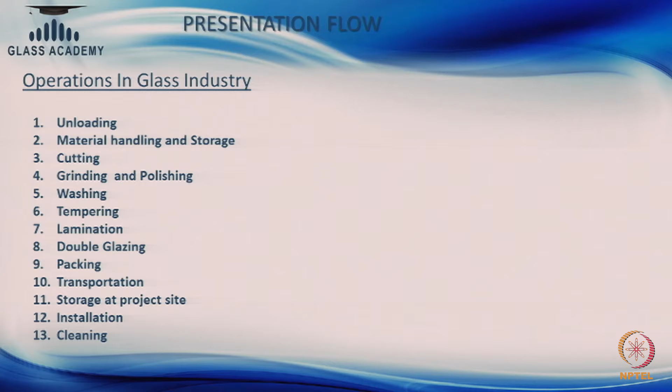I am working here as an application engineer. So my topic is on grinding and fabrication. Presentation flow: standard operating procedure in processing. Operations in glass industries: unloading, material handling and storage; cutting, grinding and polishing; washing, tempering, lamination, double glazing, packing, transportation, storage at project site, installation and cleaning.

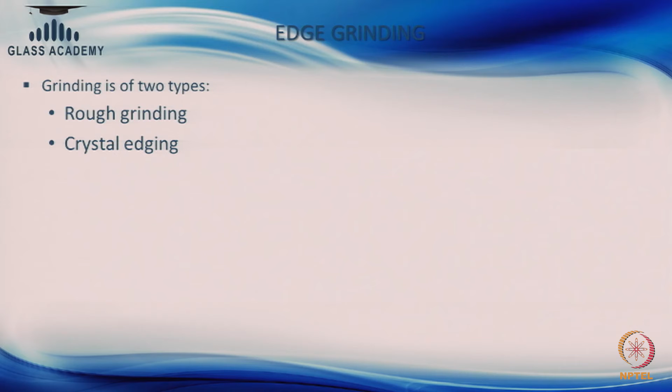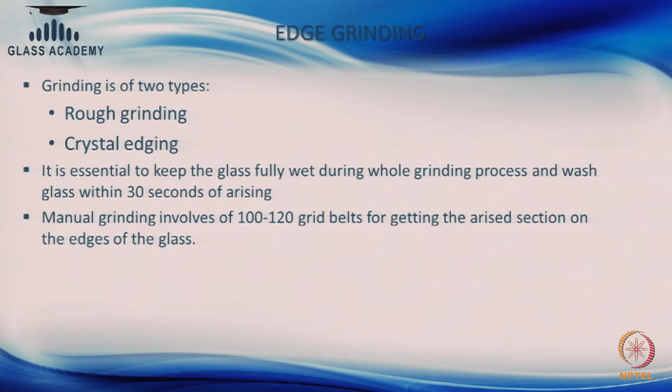It is essential to keep the glass fully wet during the whole grinding process and wash the glass within 30 seconds of arising. Manual grinding involves 100 to 120 grit belts for getting the arise section on the edges of the glass. The belt should run in a downward direction to minimize the grit deposited on the surface. If the grinding is not done properly, then the temperature in the furnace should be increased.

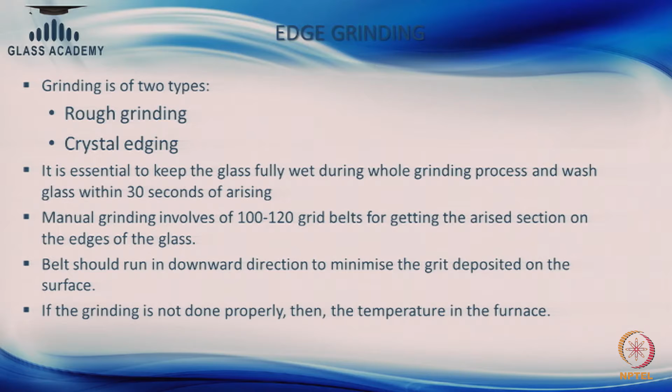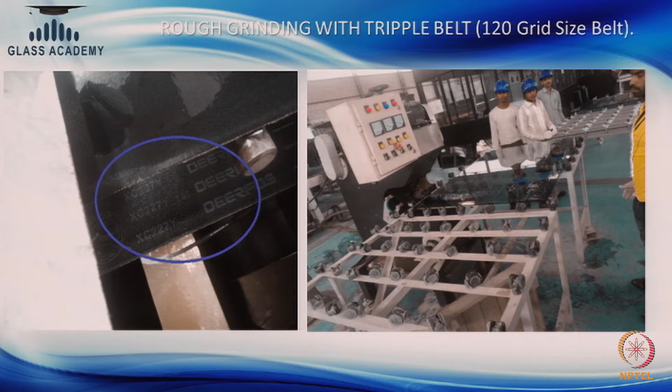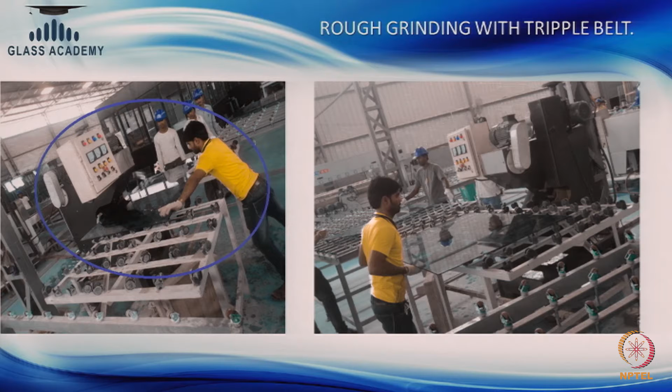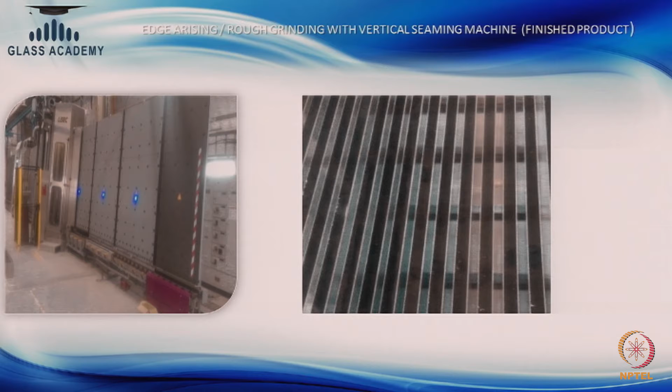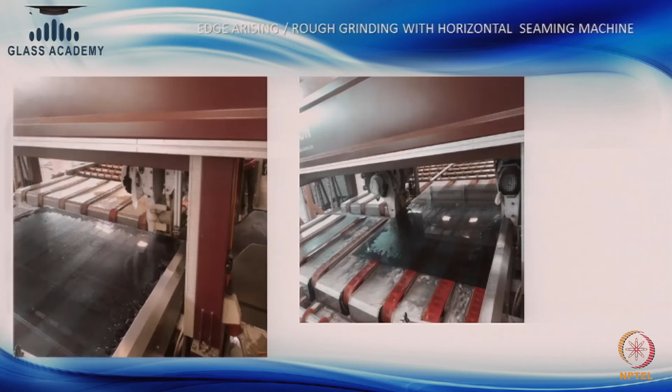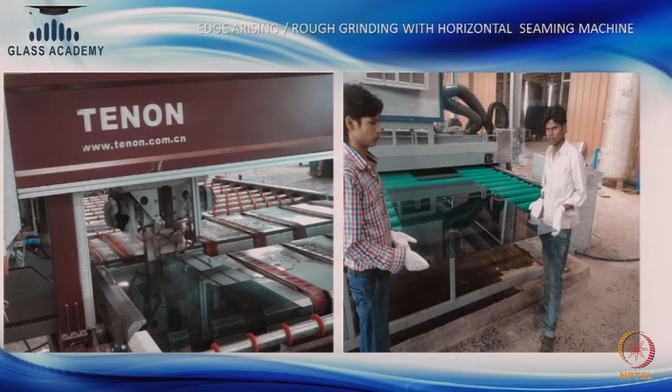In the first photograph there is a line of the vertical seaming. In that we have to grind with a fine belt like 140 to 160 grit size, and the photograph shows the finished product quality. Edge arising or rough grinding with horizontal seaming machine. Edge arising or rough grinding with horizontal seaming machine, quality of the finished product.

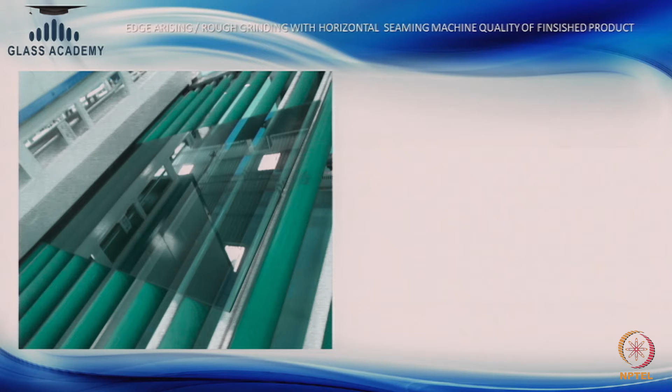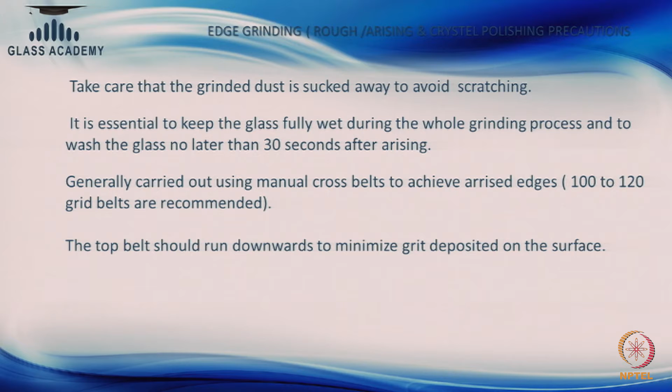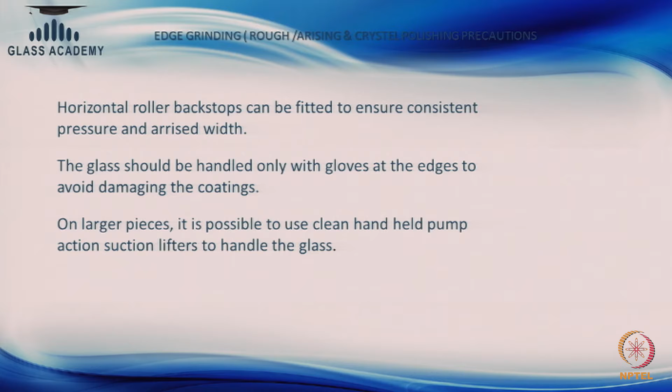Generally carried out using manual cross belts to achieve arrised edges. 100 to 120 grit belts are recommended. The top belt should run downward to minimize grit deposited on the surface. Edge grinding, rough arising and crystal polishing precautions. Horizontal roller backstops can be fitted to ensure consistent pressure and arrised width. The glass should be handled only with gloves at the edges to avoid damaging the coating. On larger pieces, it is possible to use clean hand-held pump action suction lifters to handle the glass.

Care should be taken that no glass piece gets stuck to the surface while grinding. The distance between pads has to be adjusted for the thickness, and pads should be cleaned frequently in order to avoid pad marks on the glass in case of a vertical grinder. Glass has to be washed immediately after grinding, which will avoid the drying of the grinding marks. Quality of grinding is very important for tempering. Temperature of the furnace has to be increased in case of glass having poor grinding quality, which in turn will affect the optical quality after tempering.

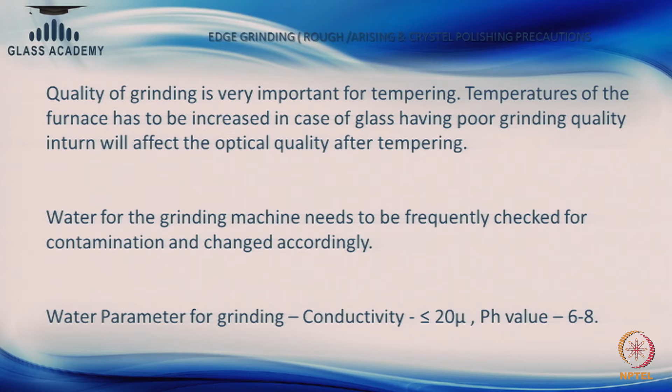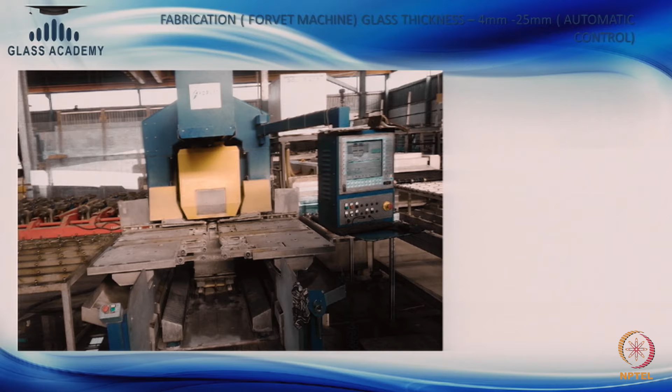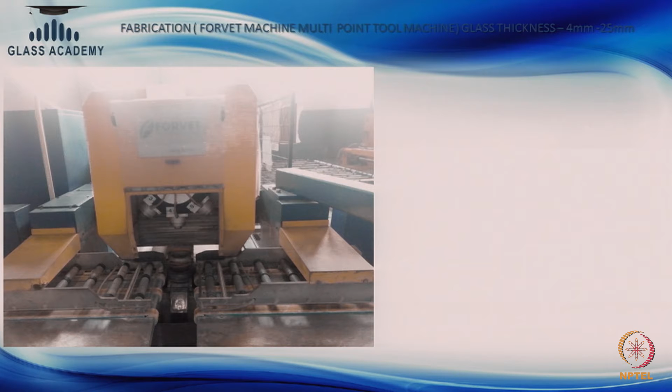Water for the grinding machine needs to be frequently checked for contamination and changed accordingly. Water parameters for grinding: conductivity less than or equal to 20 microsiemens, pH value 6 to 8. Fabrication: Forvet machine, glass thickness 4 mm to 25 mm, automatic control with fully CNC. Fabrication Forvet machine, multi-point tool machine, glass thickness 4 mm to 25 mm.

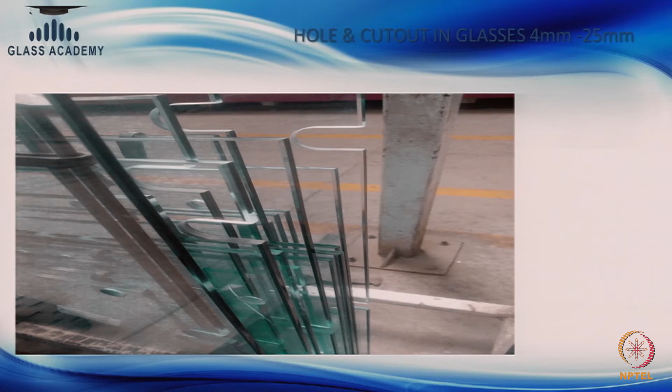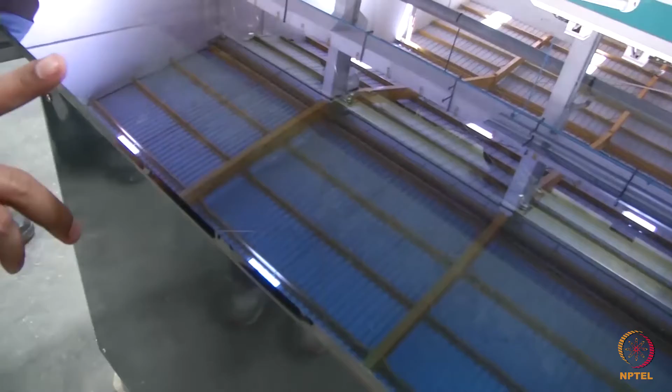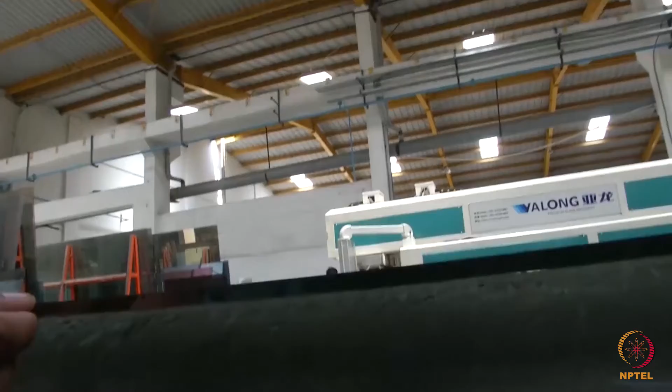I am continuing. Now we are going to see the seaming edges. In cutting, once the glass cutting is over, you can find the edges are sharp. So we need to grind the edges of the glass. We can do edge grinding in two ways: one is with the help of a double edger, and the second one is with the help of a seaming machine. When your edges are exposed, you will be going for a double edger. You rotate there.

I will show you this. Okay. While speaking, you show there once, then you come back.

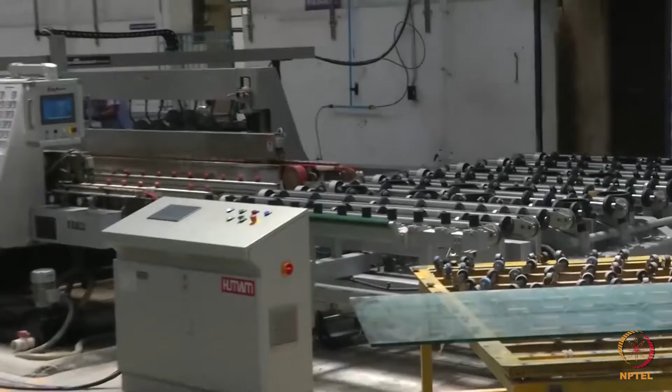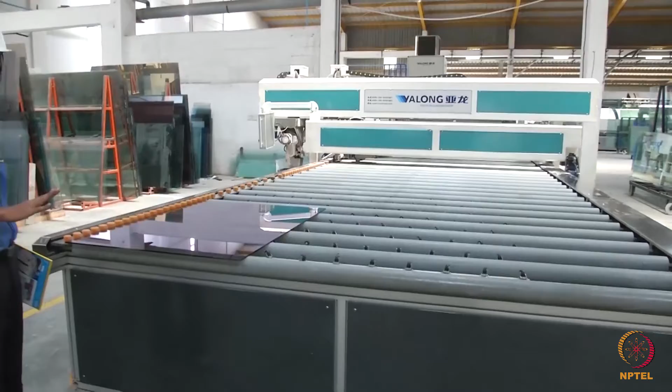When the edges are exposed, we will be going for a double edger machine, where the glass edges will be polished and the edges are exposed. Whereas in other cases, the glasses will be going inside the frame or covered. In those cases, we will be doing it with a seaming machine. So through the seaming machine, we are just erasing the sharpness on the glass, and it is used for covered edges.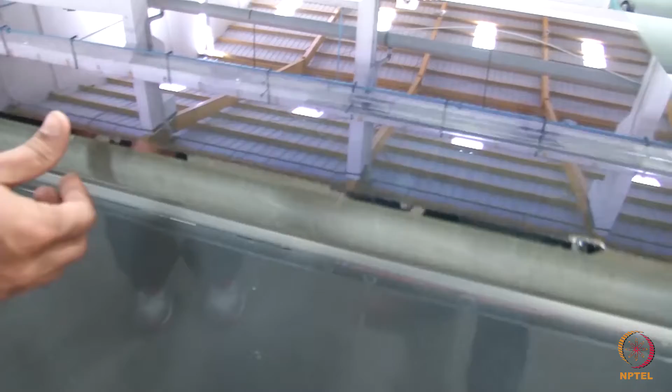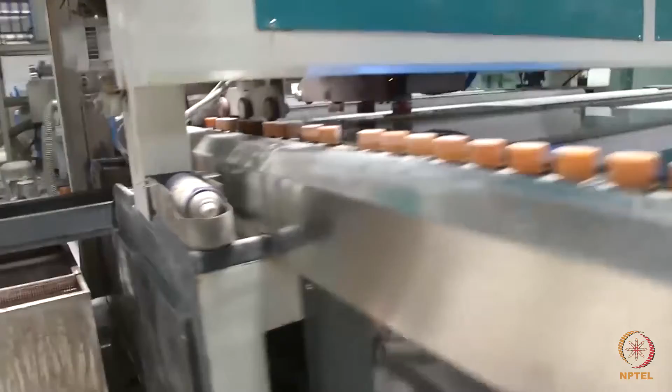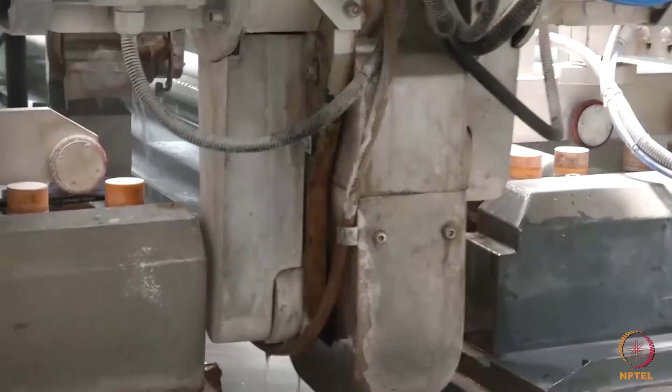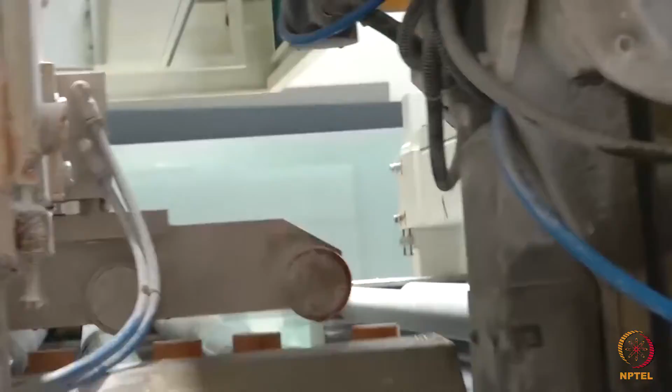Seaming machine, where we are feeding the glass into the conveyor. The settings will be done, and the head will sense as per the glass size. With the spindle, the glass will rotate all the four edges. Now the grinding is over. Next it is going to the washing section.

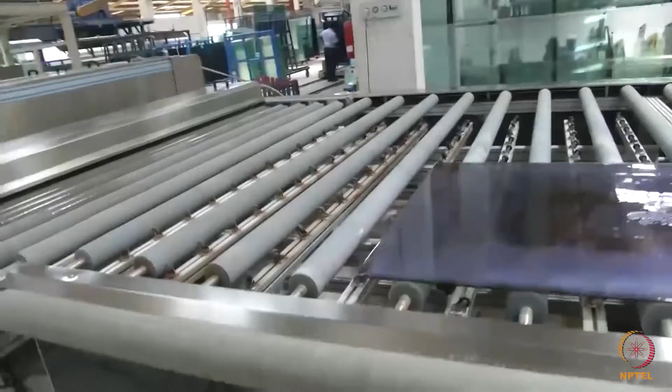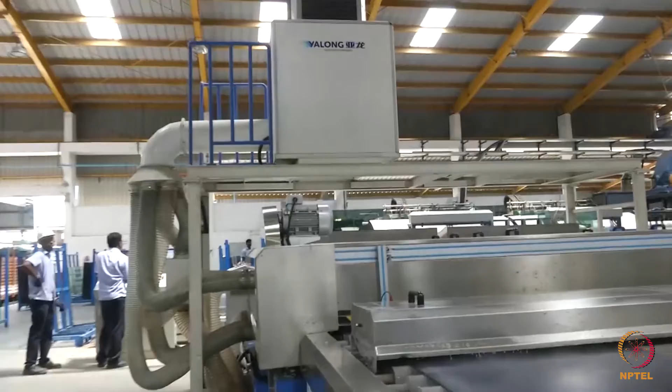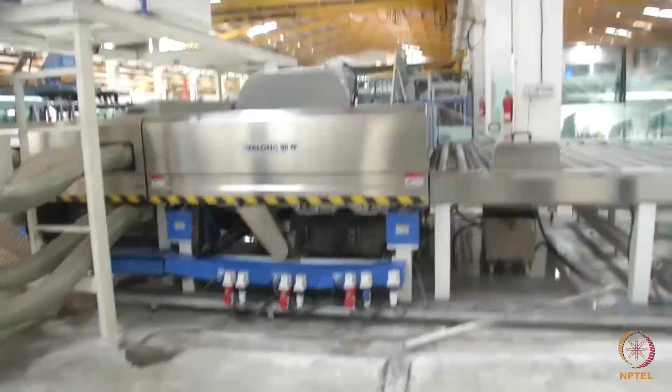Wait. Next it is going to the washing section. Come here.

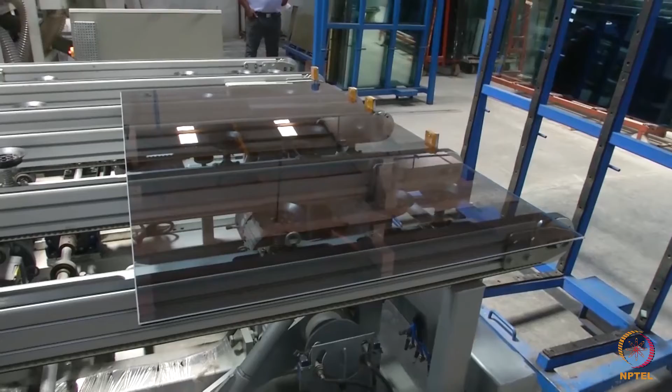Now you see the seaming edge. Through the seaming machine, all the four sides have been grinded and washing has been done. Now it is going to the unloading table. So this is the auto unloader where the glass will be automatically unloaded. So through the suction cups, the glass is getting placed on the trolley.

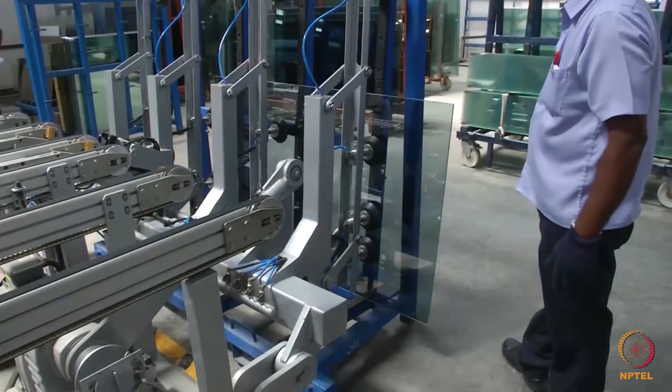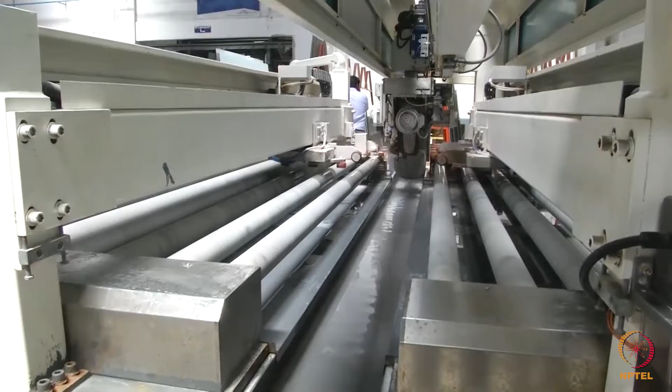It is having two heads. That is known as spindle. Two spindles will be moving and it will be grinding all the edges.

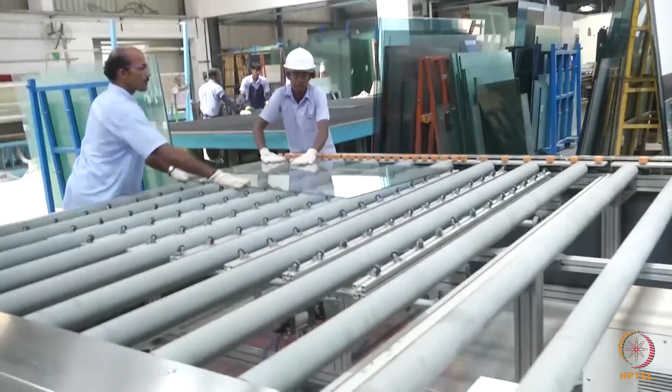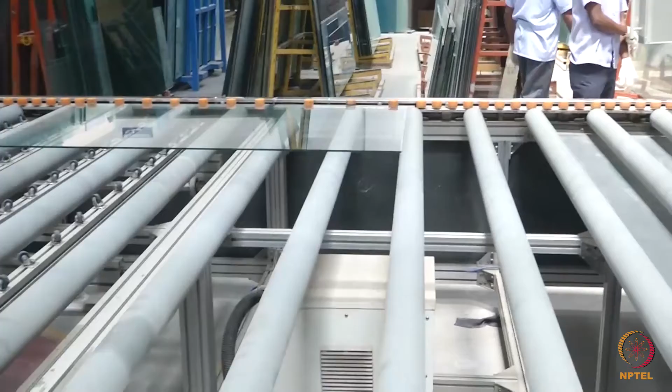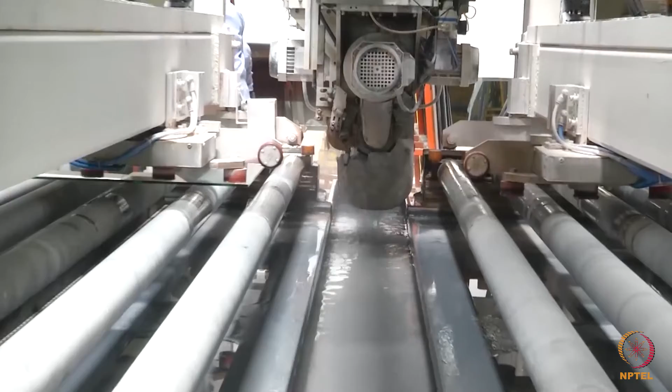Now the glass has been loaded. Now it is going inside the seaming machine. Now the size will be sensed and with the help of the spindle it will be grinded. You can see.

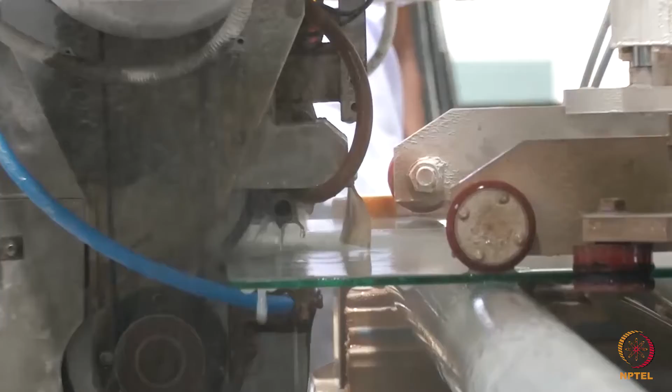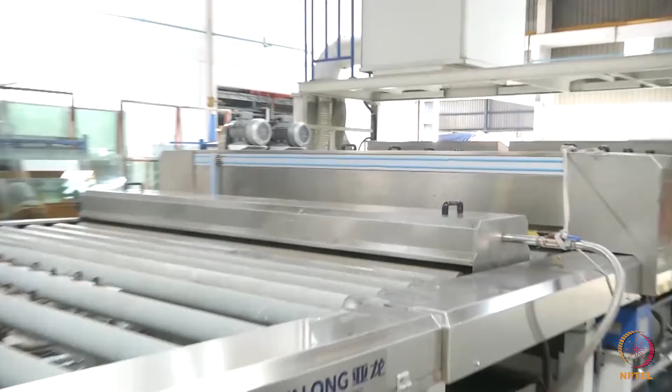Now it is going for washing. One more glass. Now it is going into washing. The glass is coming out from washing.

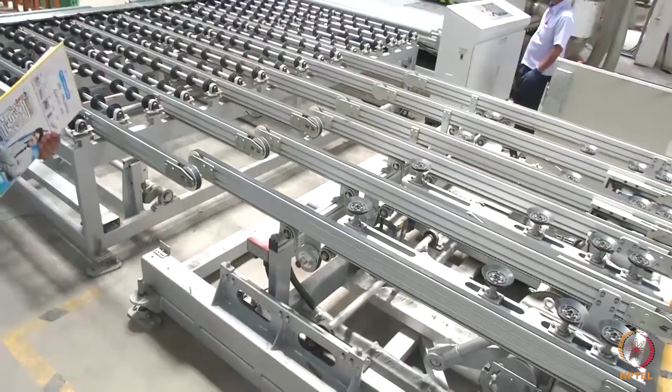We need to make sure that the water quality is also maintained in terms of pH 6 to 8, TDS 0 to 20 milligram per liter, and conductivity 0 to 20 microsiemens per centimeter.

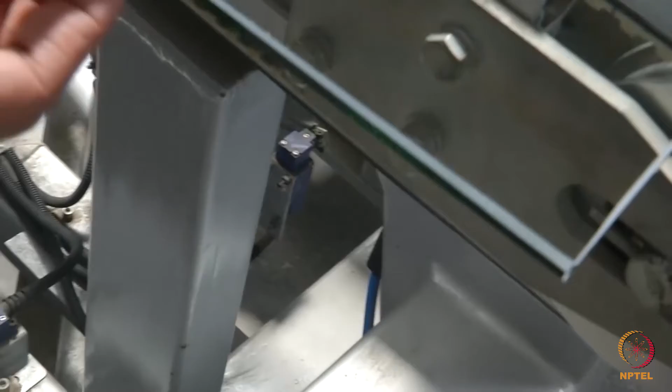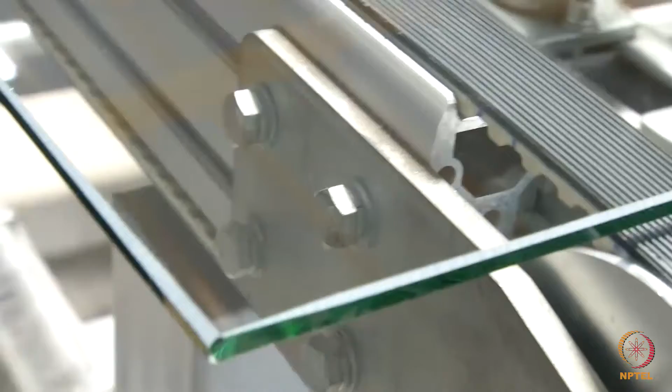Okay, stop. If you see, the edges are just arrissed, and we don't have polish on this edge compared to the double edger, where we are going to get a polish on the edge surface. So we are just arrissing the edges and removing the sharpness on the glass. And these seaming edges are applicable for concealed edges and when the edges are going inside the frame.

You see this, you take this from this side. So we are just removing the sharpness and arrissing. This edge finishing is applicable for covered edges and when the edges are going inside the frame.

From this angle, all these are seamed edges where the edge grinding has been done through the seaming machine. We are erasing the sharpness and giving an edge arris to the glass.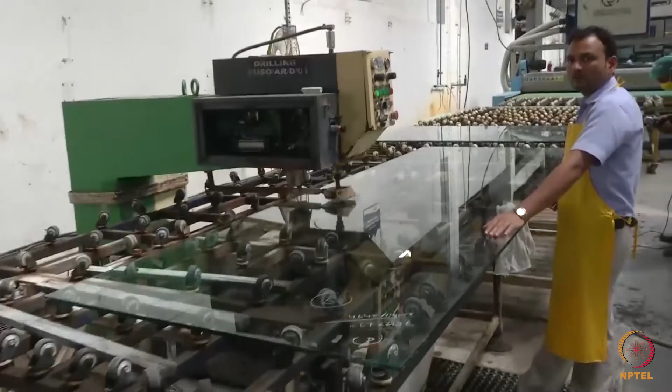So this is our fabrication area where we will be doing glass holes and cutouts with the help of these drilling machines. Now you can see they are drilling, making a hole in the glass. In the meantime, you see here. Now they are doing marking on the glass. They have made a template that is known as a Mickey Mouse cutout.

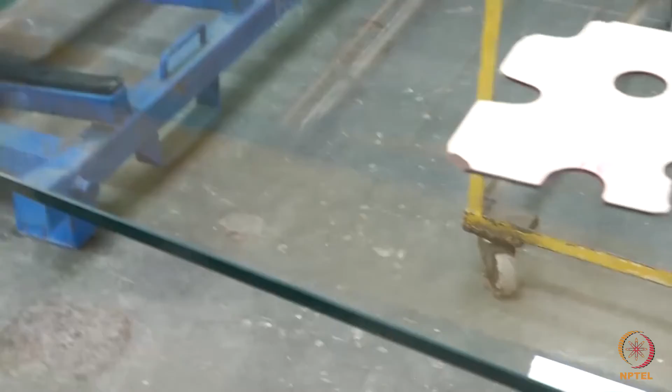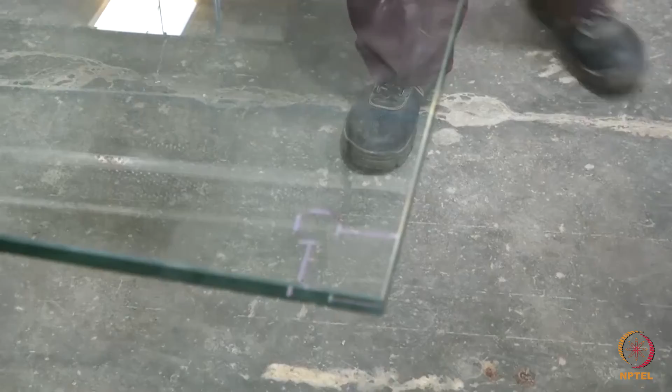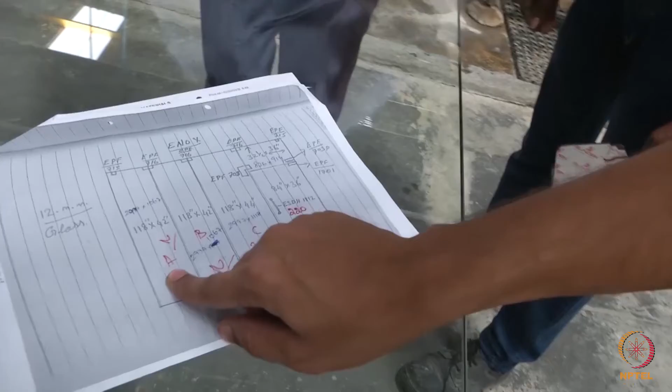Now they are going to cut this particular area. In this particular session they are going to do marking as per the drawing. This is the drawing. So now they are going to do this A glass. This glass is having two cutouts, 1 and 2. As per the drawing, 2 cuts, 1 and 2. No hole. Okay.

In a similar way, the tests that we do for grinding are similar to cutting. That is, we are going to check the length and width with the help of a measuring tape. Next, we will be checking the overall thickness of the glass. Diagonally also we will be checking. We will be checking for scratches. Coating surface also we should be checking, and the coating should always be on the top side.

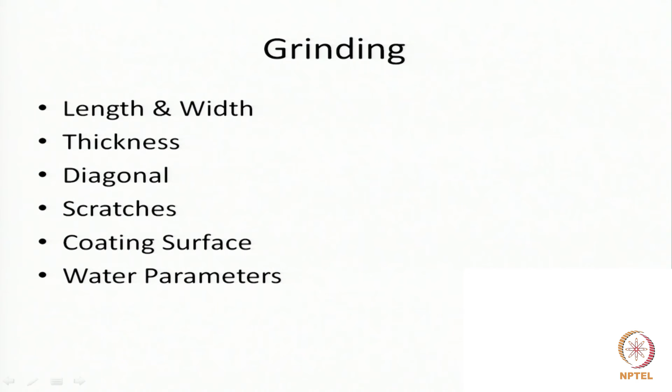And along with the above parameters, we will also be checking the water parameters, so that we ensure there is no reaction between the glass and the water, by maintaining the pH, TDS and conductivity values, and also the temperature of the water.

Next, let us see what tests we do for fabrication. In fabrication, we need to first understand the drawing. What is the customer requirement? Next, according to the drawing, we need to have the marking on the glass. Next, we need to understand the distance from edge to hole, hole to hole, and the number of holes in the glass, cutouts and notches. We need to understand the hole dia, and whether the glass is having any countersunk hole.